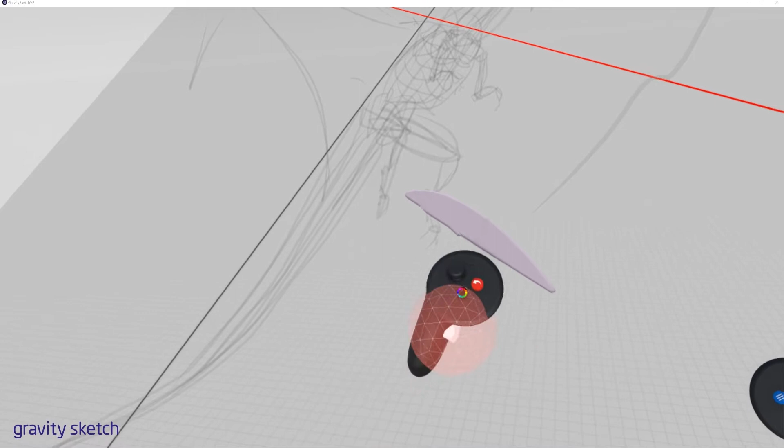Let's just undo that. There we go, that one will be fine. Let's just get the size about right. It doesn't matter about size really, because I'm going to be making a piece and then shrinking it down, and we're going to be using parts over and over again.

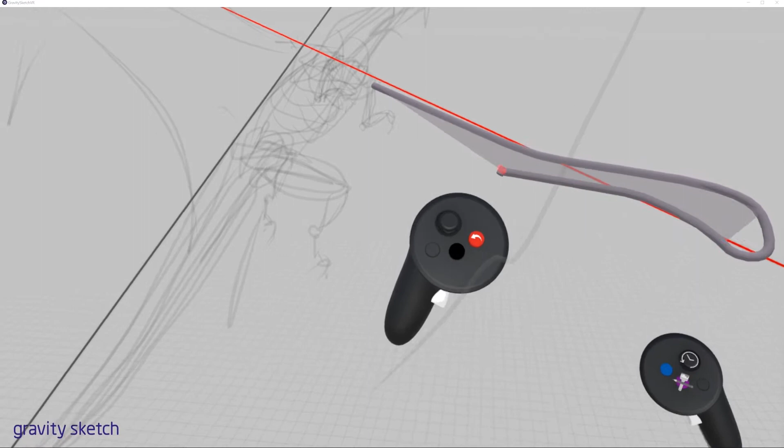First of all, I want this bone here, or this strut that comes off the main body. So we'll just draw it, put a bend in it, and then I'll leave it circular at the end because I'm going to put a pin through that, and then bring it down here, and we'll leave it. Bear in mind it's not going to be organic, it's supposed to be mechanical.

I don't like that actually, so I'm going to undo that, and the reason I don't like it is I don't think I've got it thick enough. So we'll delete it and do it again - you can see what I mean in a moment. Just don't think I gave it enough volume. There we go, that's perfect.

So that will be this bone here. Now straight away I've decided I've made a big mistake, and it's a good one to remember - I've just made it without doing it symmetrically. You can see I want it on both sides. So again, we'll just quickly go back.

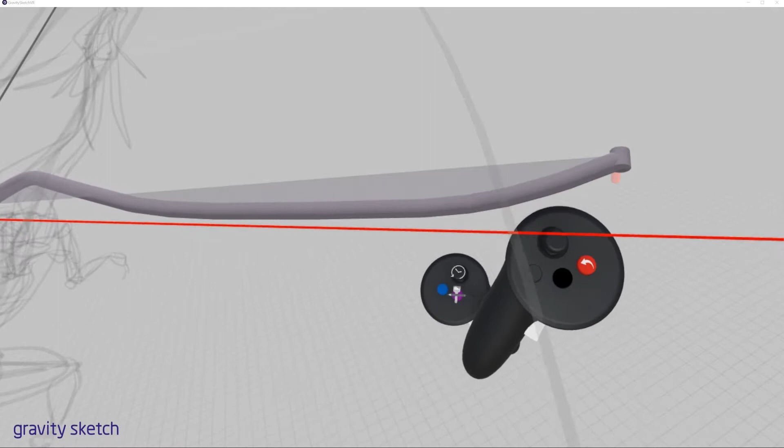We'll go and put on our mirror. Let's get back to settings. We'll make sure mirror's back on. And we should be able to now do exactly the same thing. And we've got that duplicate across the other side. So it's a good thing to watch out for - it's an easy mistake to make.

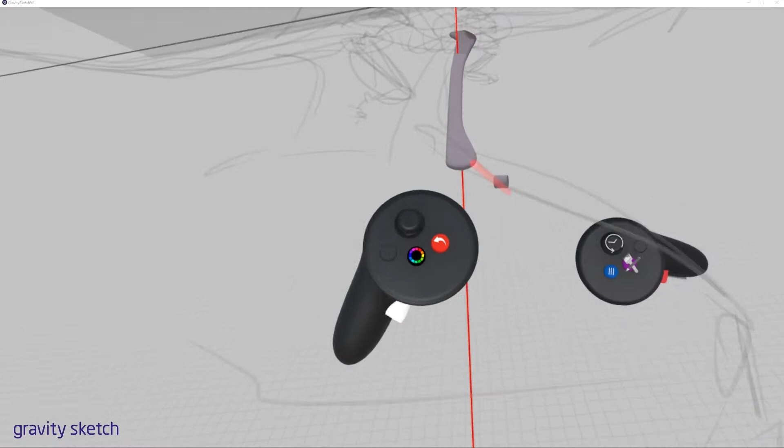That's that bone done. So we'll put that one in place, right by the rib cage. There we go, I'm quite happy with that. I'm going to put a pivot, like a pin in here, so that it would be able to hinge here if it was a mechanical part.

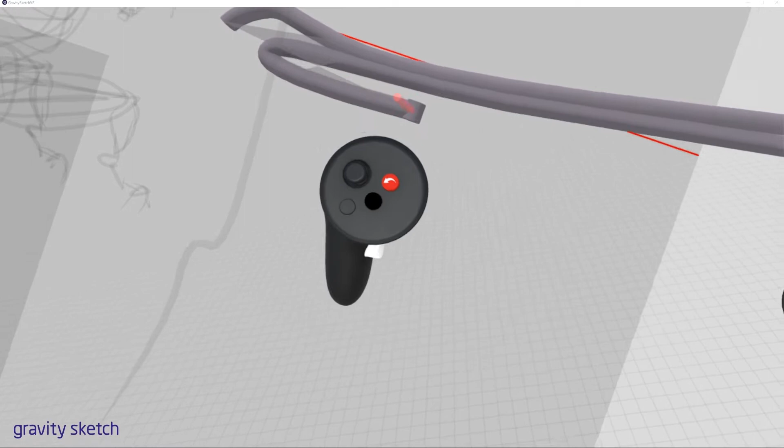So we're going to do the ulna and the radius here. We'll do it all in one part. We'll come round like this, a bit thinner on this side, back to the circular bit, and then we're going to go larger on this side.

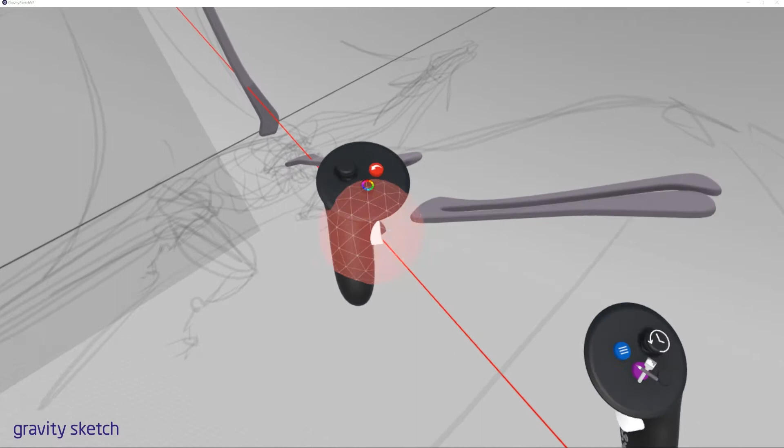And then back to the base, and that gives us that bone there. It's a bit chunky, but that's what I like. And we're going to sit that on top, like so. So that's given me... actually, no, let's sit it underneath, shall we?

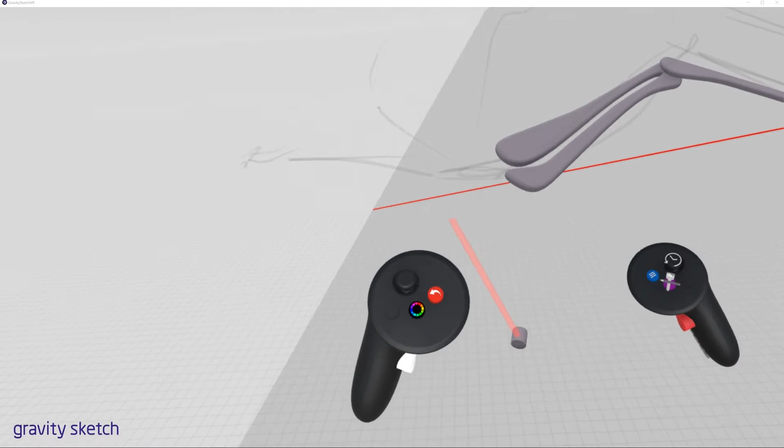That's fine. That's where that pivots, and then everything from there on is a finger. So rather than doing each individual bone, there should be a hand here, and then we'll go straight into fingers. What I'll probably do is just do one little piece that represents the hand. I'm just making a shape.

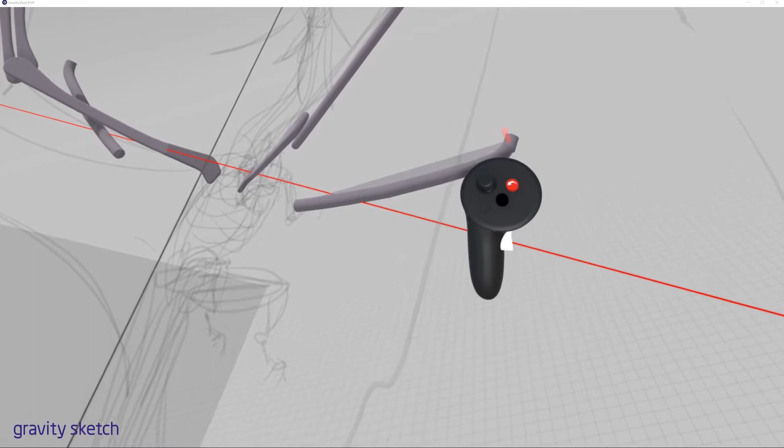This bit doesn't really matter, just for now, and that's going to hold the fingers on it. Now we'll draw some fingers. So again, I'll go back to this orientation. Start the fingers here, and then there would be a knuckle of some description, second digit, and third.

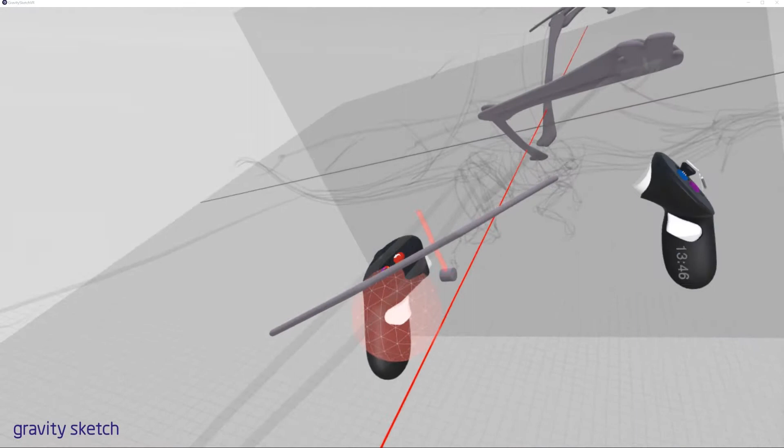Coming back on myself, the joints again, and back on myself, and I might just put a little circle at the end there. There you go. Remember how to move them - if you're not sure, go back to the basic videos and take a look. Inner grips to scale them. There you go, that's worked out quite well now.

And I'll have a series of them coming down here. How do I do a series of them? Well, you grab it at the bottom here. Click once. Click again. Scale it a little bit actually. Just making sure I'm matching my sketch underneath, which I am. Don't mind them intersecting here.

So they're all fine. And now there's a bone here which comes off the elbow, which I guess is kind of the olecranon - though I'm not that sure on dragon anatomy, and also they don't exist, which is another point. I don't know exactly what bones to put in. I'm basing it off bat anatomy, and it's also a robot, so it's always best to base something off reality rather than just completely making it up.

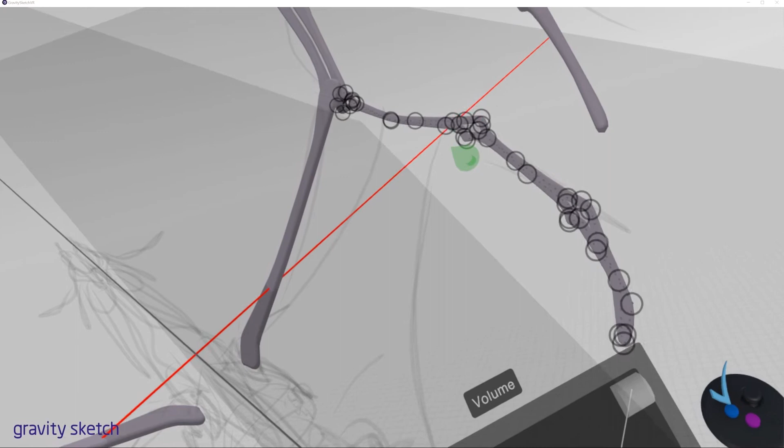Learn the rules and bend them is the way I was taught, but make sure you know the rules first of all.

Almost - you can see what I'm doing there. I've just made it too thin, so I honestly don't know whether I need that there now. Well, now I've looked at it, I think what I'm going to do is delete it. So grab it and then red button to delete, and I'm going to draw a specific bone just for this part. Wasn't comfortable the way I was trying to mash that one part into it.

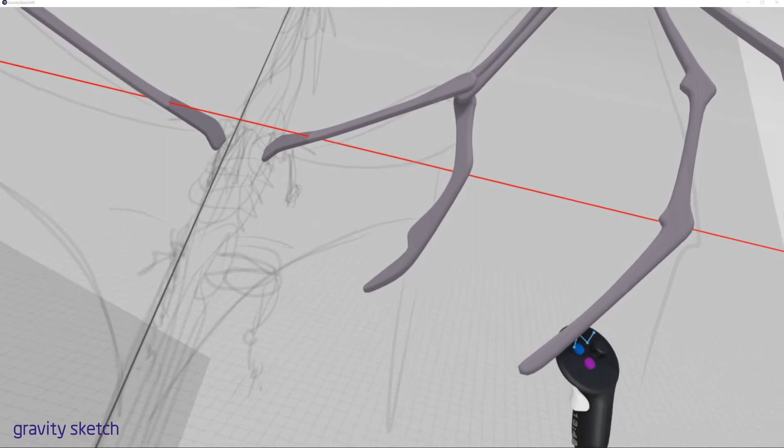There we go, so I've drawn a very specific one just for this bit. Maybe even a bit smaller, like so. So yeah, I'm quite happy with that now.

So that's really the bone structure. I don't really need to do anything on the body because the skin's going to come all the way back here. And I've got to do some kind of a joint system.

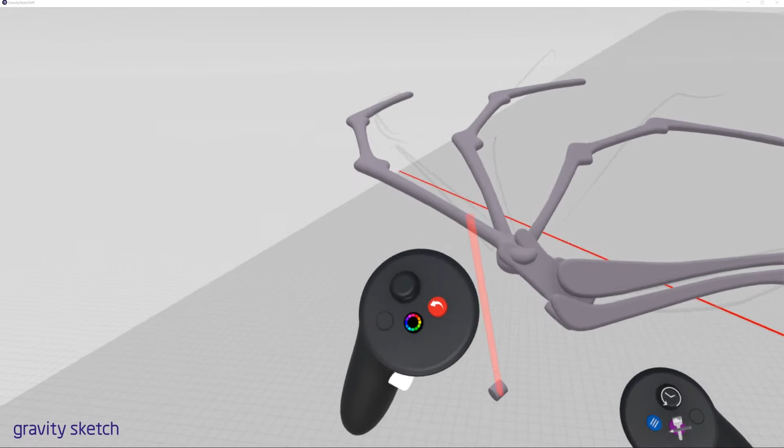Let's just make sure that one's on the top. Actually, that would look better. Would it? No, I know what's happened. Oh, I know what I don't like about that. I keep seeing things and changing them.

Is that hand part? So I'm going to make that a double, and then change this to go in between that double. And that makes it a bit more mechanically sound, if you can say that about a dragon wing. And now I'd like a bit of a bend in here, so it goes up and over and down and back to the body.

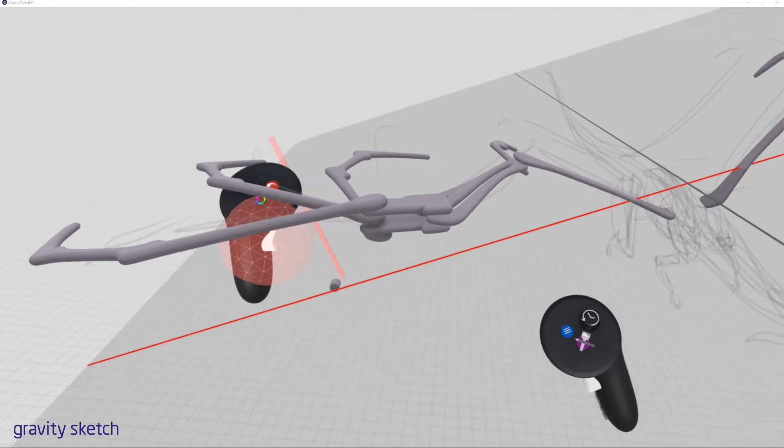Yep, I'm happy with that. So let's put the skin of the wing on, then we might put some details on it before we go to the next part. So how does that work?

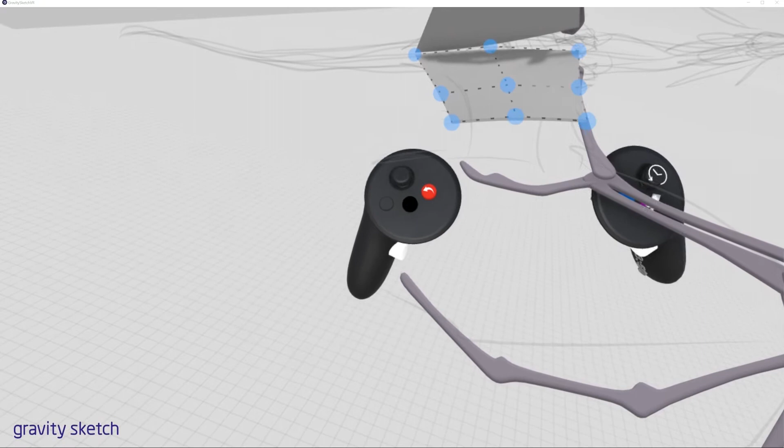So how does this work? Let's have a look - I want it to come all the way from the back here. So what I'm going to do is start here. Actually, that surface tension - initial tension, sorry - might need to come down a little bit more. There we go. So what am I going to do? I'm going to do 1, clicking 2, and then we're at the wing.

I'm going to grab both the inners, that allows me to move. I'm going to do 1, 2, 3. 1, 2, 3.

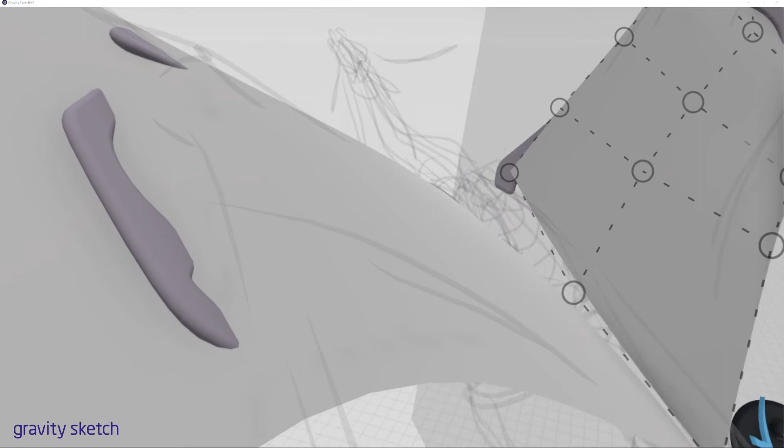1, 2, 3. Okay, why have I done that? Because now when I grab it and click the blue button on the non-drawing hand, I'm going to adjust it point by point. I didn't want too many points, and I wanted to know exactly where they were. I'm not going to snap it to the center, because with these wings, what we're hoping to do is make them so we can flap them and animate them later, so I'd like to have them completely separate left to right.

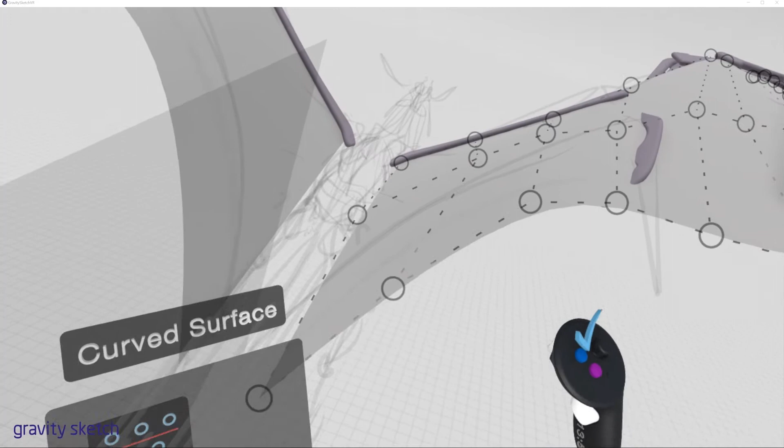Now what I'm going to do is just adjust it point by point. I'm hovering over each of the points, going to each one like so, and just pushing it into place with the bone structure. If it doesn't work, I just bring the points together.

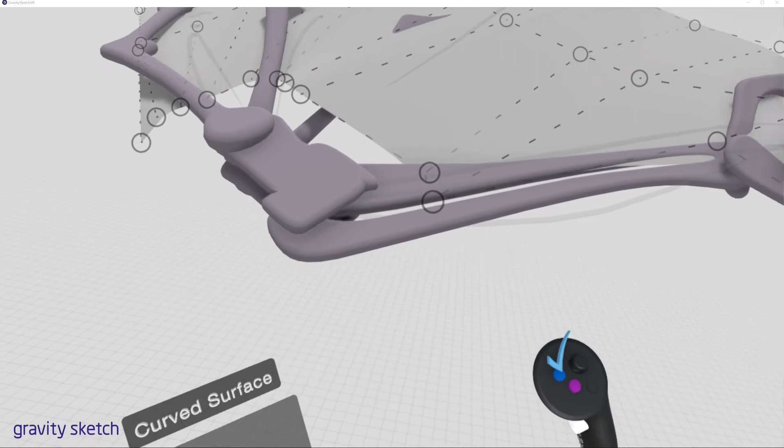Like so, and now I'll slowly work our way through this one. So one here, and I'm going to leave that gap between those two bones because I think it looks quite cool. I'll bring it in here, and this one I'm going to do one by one, nice and slowly, keep zooming right in. This one. There we go, so they're all almost in place.

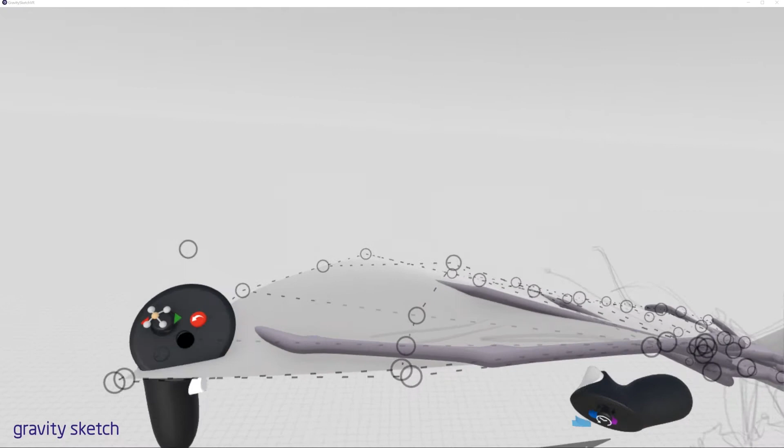That's good. Now look underneath, it's not worked, so I'm going to bring that one up. Let's go back and carry on where we were. So over here, to go back a little bit with that one, trying to fill in all those air gaps without losing any of the design. This one's fine, so bring that down here.

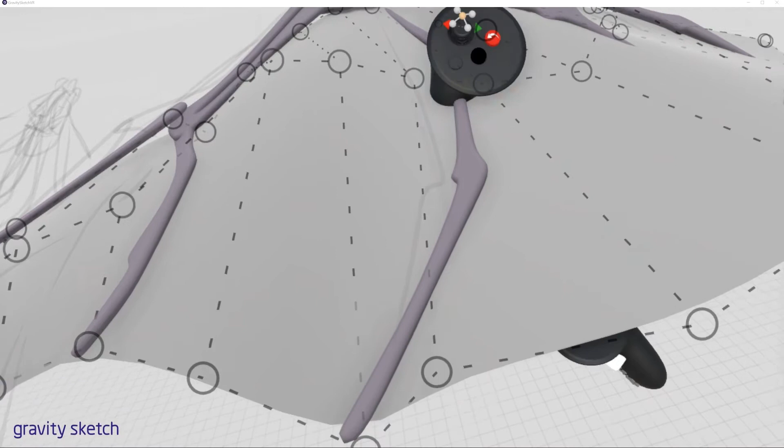I want it up in the middle, because what I'm after is for it to look like the skin's flapping in the air. So this should have an arc in the middle here. And if you think it needs another span, you simply flick with your thumb on your drawing hand, go to the one that's got the orientation.

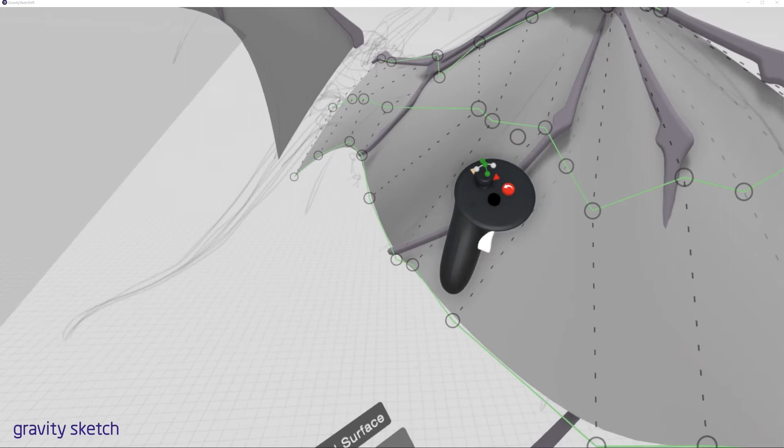Red was this way, green is this way. I'm going to pick this one and click, and that gives me another span like that. Now it does look like I've messed it up a little bit, but what that means is I've got a lot more flexibility. So flick my thumb again, bring it down, and now look, it's going to be easy with this extra span in the middle there.

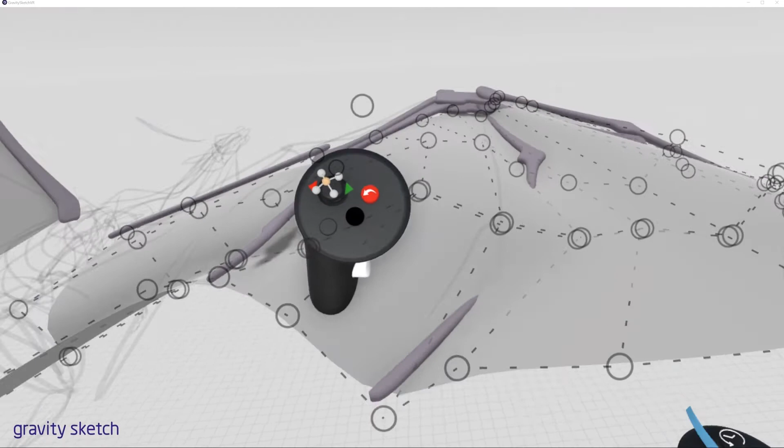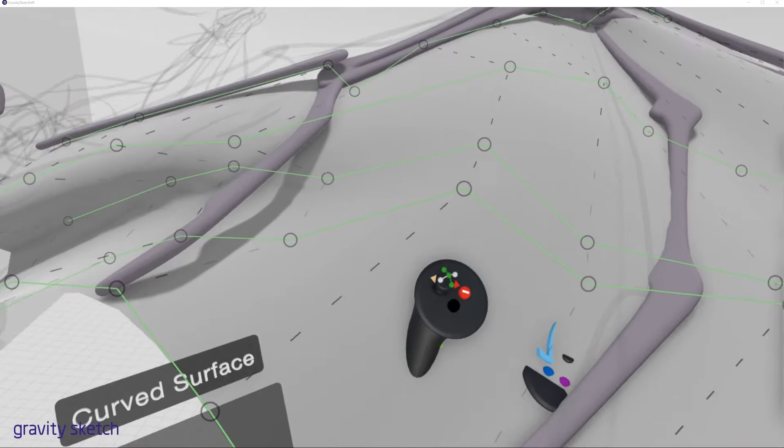I can bring it down, just separate those two out. In fact, they seem too close together there, so I must have done two by mistake, but that's fine. Just make sure they're separated. And what we'll do is - actually no, that has gone too far.

I'm going to go back until - yeah, I'd added one too many spans for some reason, so grab this span again and just click once. That was it, there we go. And then I just undid it by mistake.

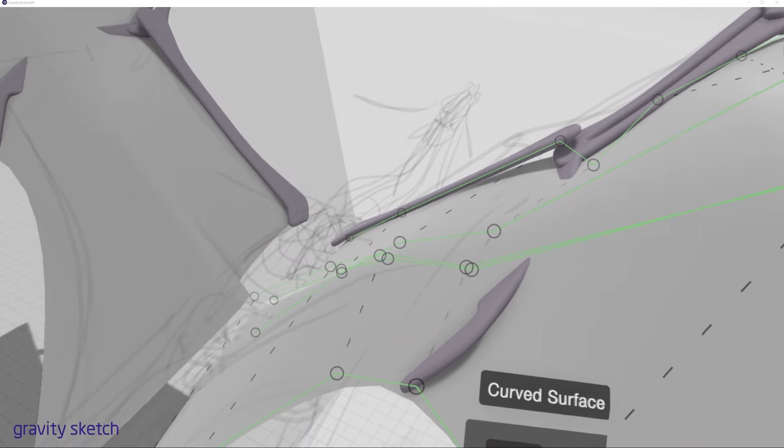Has that done it all the way? Just checking it all the way down. Yeah, that's fine, that's fine. And now back to the single polygon points, single control points, and then we go back in and just adjust them again now.

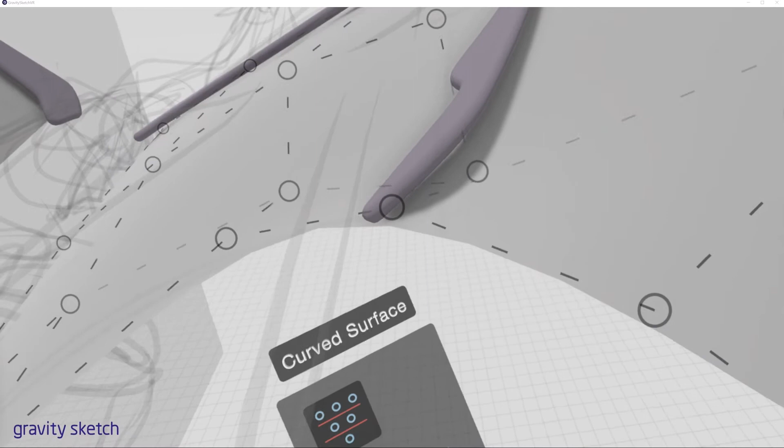So I've added one extra in. You've got to be careful, because if you add too much complexity, it just makes it harder to manipulate. It's like working with subdivision surfaces - you've got to keep it as low polygon as you can, for as long as possible.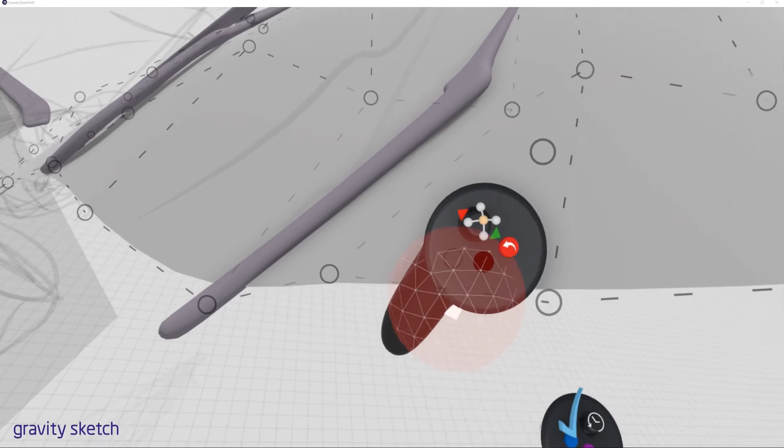That's cool, so let's bring this up, and we're back where we were now. This in the middle is fine, this one is fine, this one is going into the right surface so that's good, this one's got to come across here a little bit.

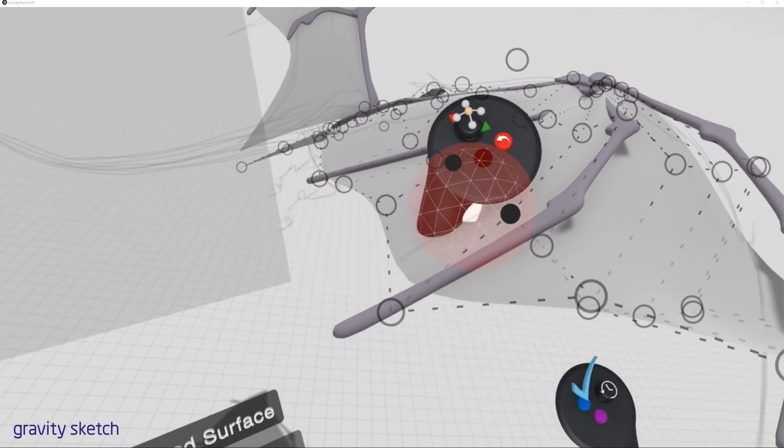Just keep looking at the flow, keep going backwards out as well if that helps. That's fine. Got a lot down here for some reason, so we'll bring all of these up. You can see straight away it brings it into the right location.

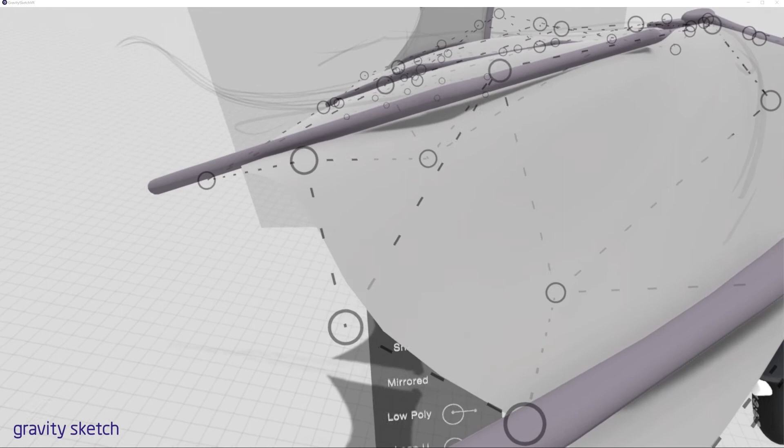Remember, we had lots on the end, so it's going to take a minute to get all of these right. And this one up, and this one up, this one up. Remember, we'll go underneath again in a moment like we did and have a look what's happening underneath, to make sure we can see all the spans - I want to be able to see all the bones from below.

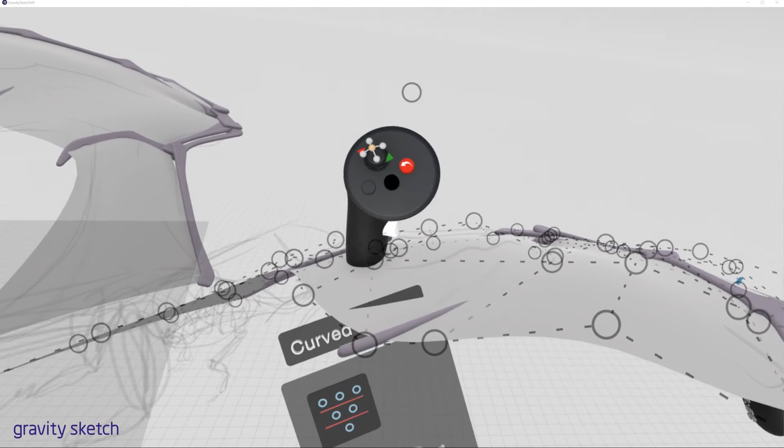A little bit more tweaking. Trouble is, if you fix it in one orientation, you might have broken it in another, so you've got to tweak it and tweak it until you get it right. Cool, so that's okay.

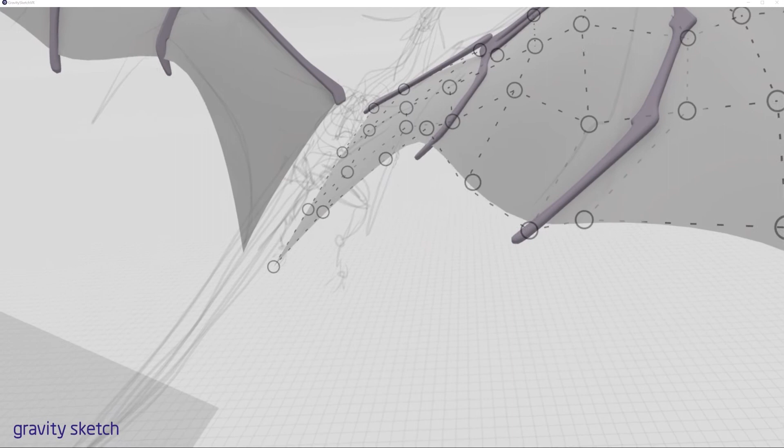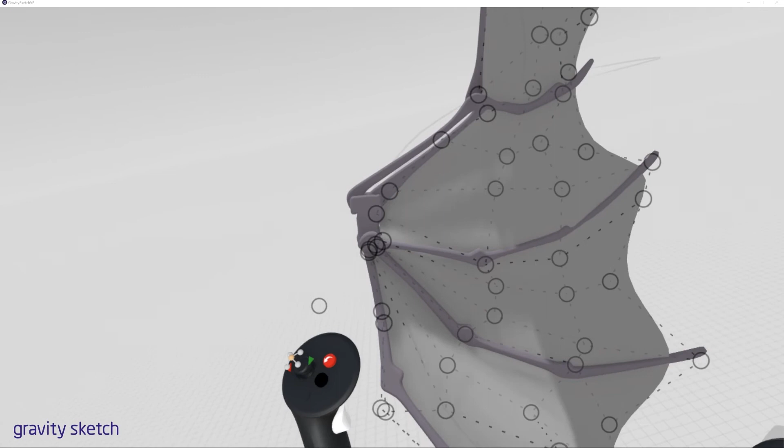A little bit more noodling just till we're happy. Keep spotting areas where as I pull one, I then change the other by mistake. There we go. Almost there, almost there. We just need to bring that one down a tiny bit.

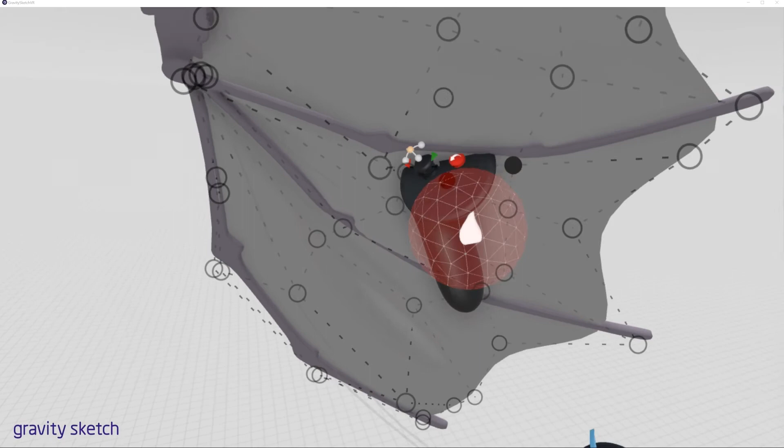You can actually see it's beginning to look a little bit like folded cloth or folded skin. Move that one up there. Yep, that's fine. So let's have a look at it from a distance. Turn the points off. Yeah, that's nice. So we're quite okay with that.

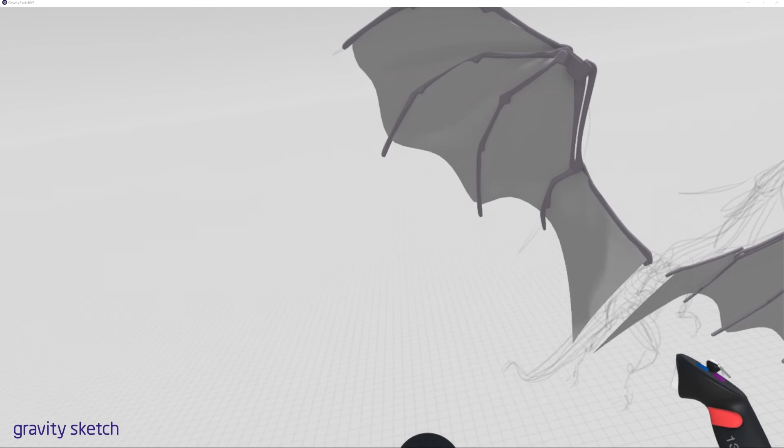Might need a little bit more there. I'm not going to stop until it's right. And this is where this does slow you down a little bit if you're getting to the noodling point like this.

So the last bit of this section is we'll put some metallic looking nuts on the joints. I've already made a grey that's just for anything that's like chrome or metal.

I'm going to use this tool, which is the revolve tool, and we'll keep it with those settings. Now if we take our non-drawing hand and just click in the center, that'll give us a vertical line. You can see the shape that's going to come there, the circle that's going to come.

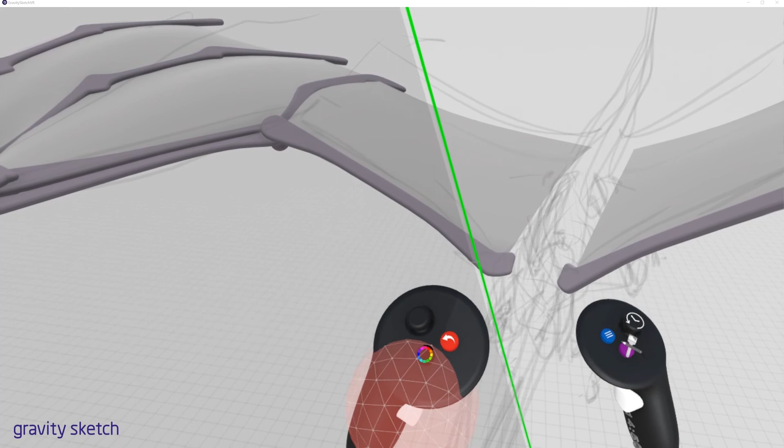So we're going to make a little shape that's kind of the nut. We'll go quite close with one click. Don't worry about the scale and the size of this, we're just making the shape. Wherever you want a nice hard edge return, do two clicks.

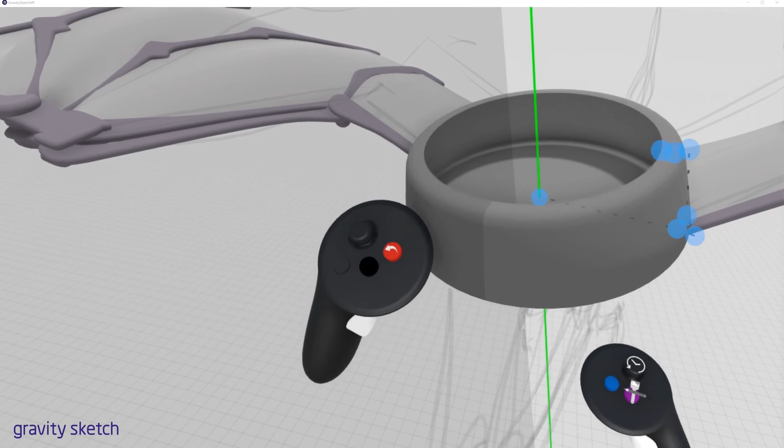There we go. In fact, that's snapped together a little bit too quickly for my liking. I want more surface detail in that, so I want to do a return there. There we go.

And now we'll take that piece. You can see it's set on mirror, so it's going to give us those mirrored sides, and we can use this as a repeater over and over again now. So we just pop it down, stamp it down wherever we want that as a joint.

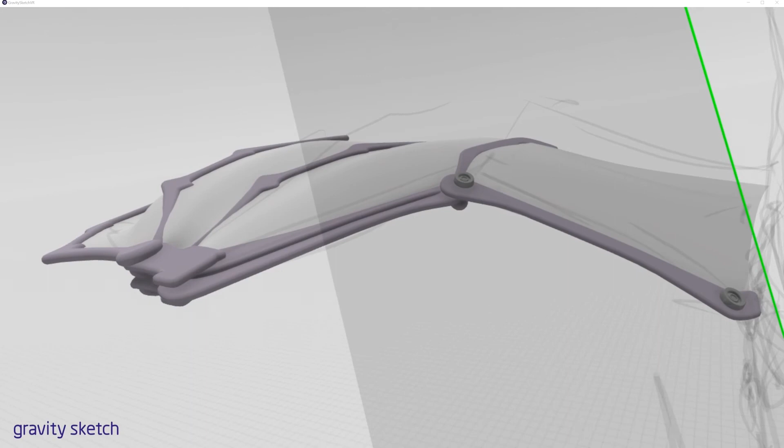We've already made all these decisions, we'd said already where we want these, so this shouldn't be too hard. I'll only put them on the first joint there, like so.

That one looked like it was floating in the air, so we don't want that. And then underneath we'll just turn it round, trigger to stamp it down, stamp it down.

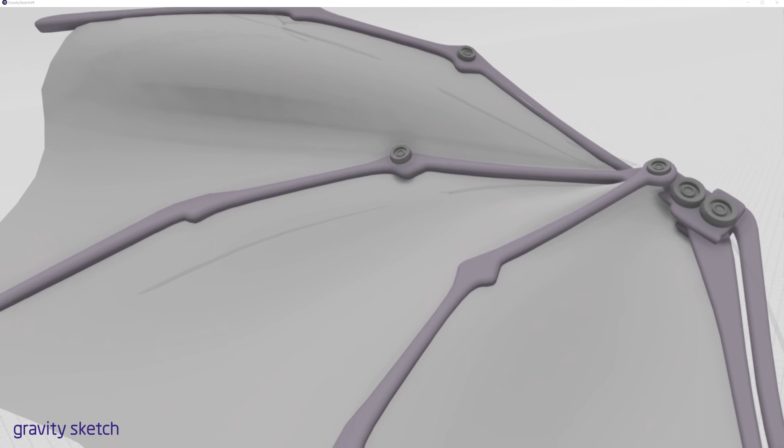I'll put a couple more on here to put a bit more interest around here. Scale it down again. Slightly bigger one here, and I'm going to put one in the middle as well. Actually no, change my mind, I will put them here.

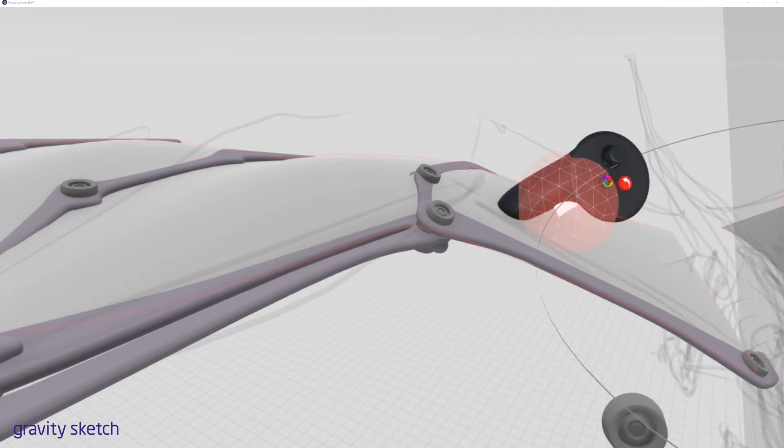Okay, and now we can use this as a repeat because it's like so. Because this wing is going to be rotating around, we're going to group it all as one. So I'll stamp this down and then put another stamp on the back of that.

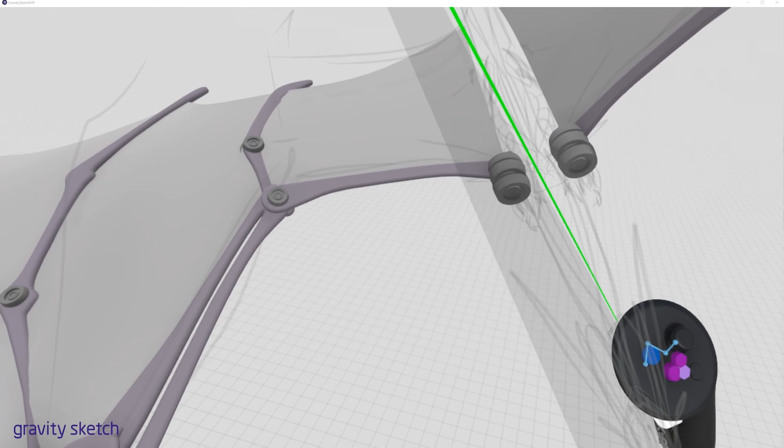And then we'll take that as a whole, and we'll start it right from here and here, and then we'll put two on the back, slightly smaller, maybe two in the middle. Might delete them later, but for now that looks good, and that'll give us something to rotate when we group it all together.

So let me do that right now. I'm going to select over everything like so. Just make sure you've grabbed it all. I didn't actually, so you see here I've missed one piece. That's one big watch out.

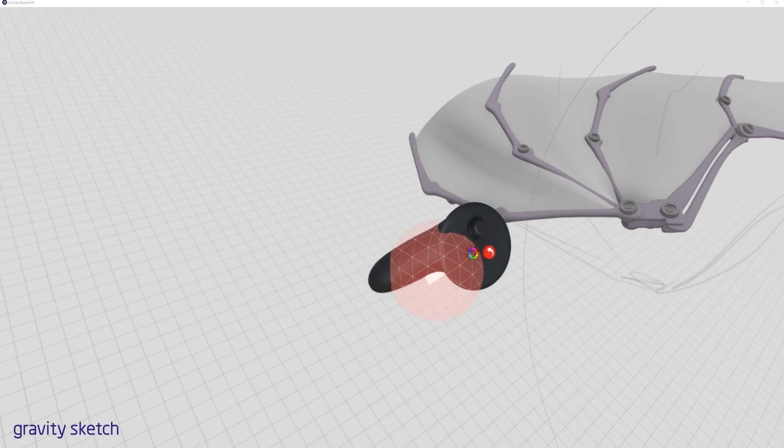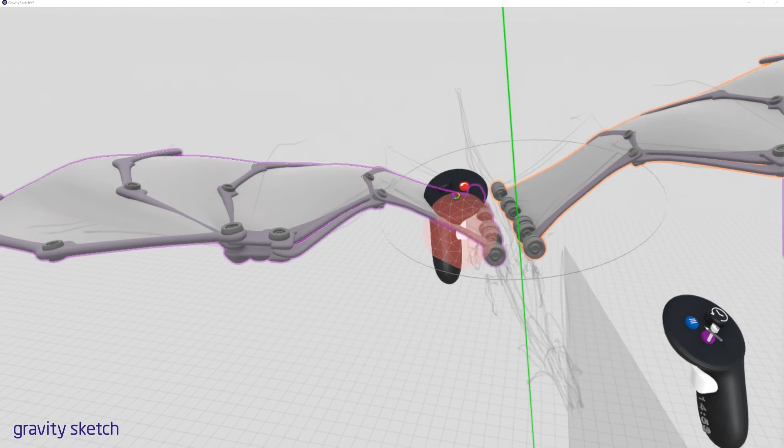So make sure you've got all of the set that you want. Oh, again, not quite. We'll get there. There we go. And then just hit on the non-drawing hand the purple button just to connect it as joining it, and then basically that's now your wings finished.

And in position. So that's section 2 done. We've done the wings, so let's move on to the head and the neck maybe, and move into the body. In fact, we'll do the whole vertebra next, all the way down from the skull right the way down to the tail.